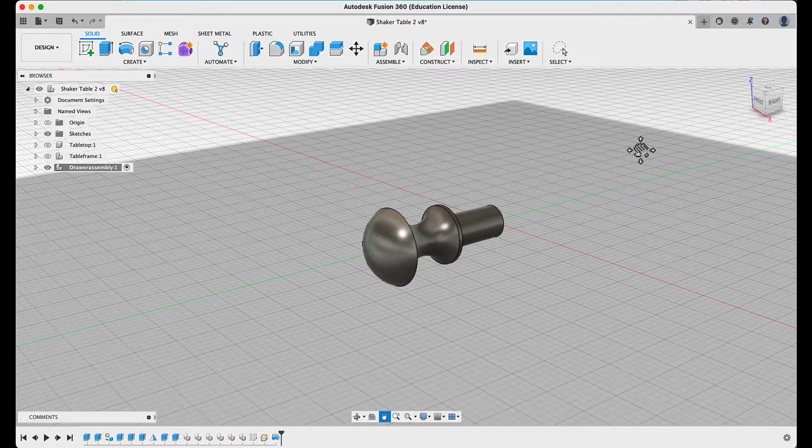In this tutorial, I'm going to show you how to create a simple turned shaker pull for the drawer.

One of the defining features of the shakers were their pegs and pegboards. Pegboards line the walls, rooms and hallways of all shaker buildings.

Chairs, wall clocks, racks and shelves, clothes hangers and kitchen utensils were all hung up on these ubiquitous pegboards, and shaker orderliness and cleanliness were thus achieved.

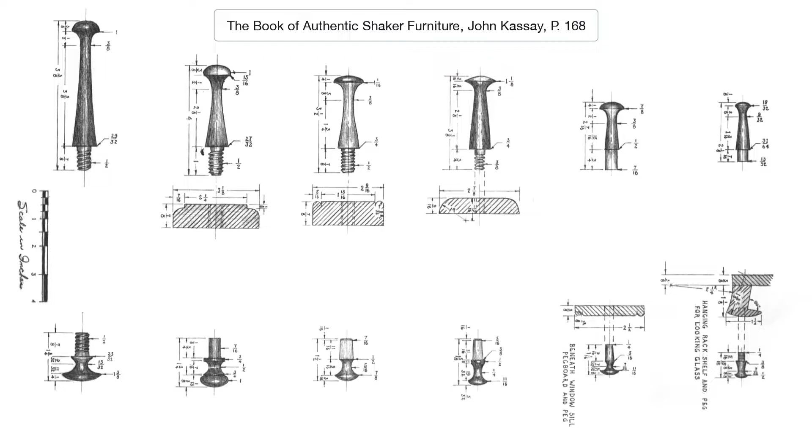The smallest shaker-made pulls, like the pegs, were individually lathe-turned, and most are as graceful as pegs, but considerably smaller. The smallest measure a little over 6mm in diameter and 12mm in length.

Others are as large as 40mm in diameter and 50mm in length. Some are even longer depending on their purpose.

Clock doors, chests, tables and even desk drawers, sides of washstands all had pulls. Indeed, pulls were installed wherever needed. This image is a sample of typical profiles for both shaker pegs and pulls.

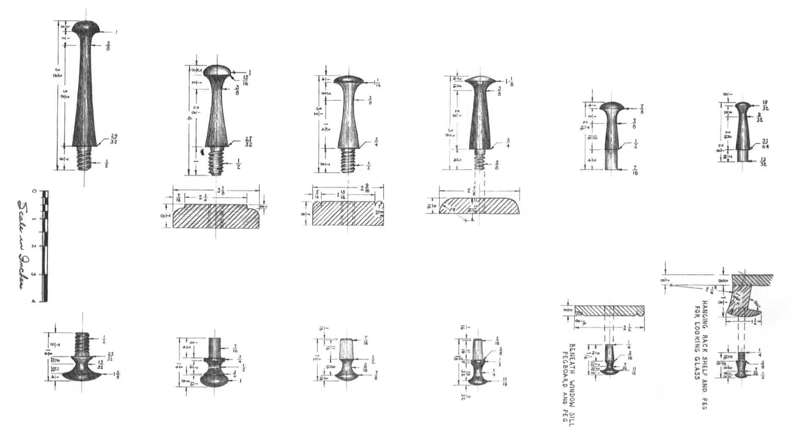To make things easier, we'll make sure we've hidden everything. We're going to start with a new sketch, off the right sketch plane.

I'll come in close because we're working on a pretty small scale. So, a line from the origin, I'm just going to come out to the left.

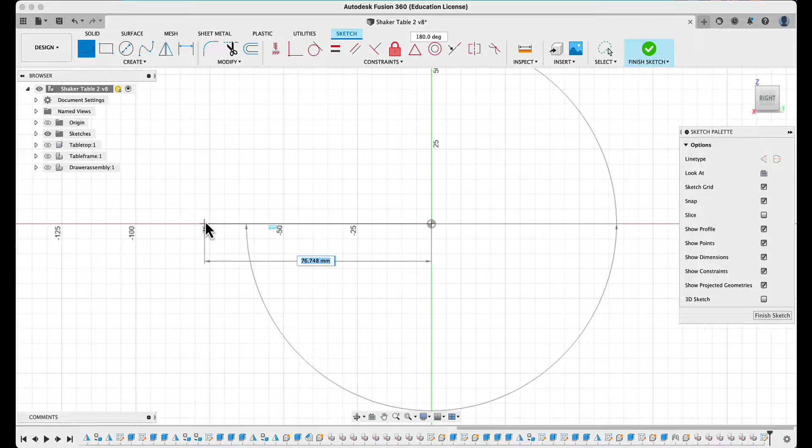Press escape. I'm just going to turn that into a construction line. Come in really close so we can see this millimeter grid here, and I'll pull that down a little bit.

So I'm going to create a profile for my shaker pull design that it can rotate around. That might not make a lot of sense to you at the moment, but you'll see as I go through this what the techniques are.

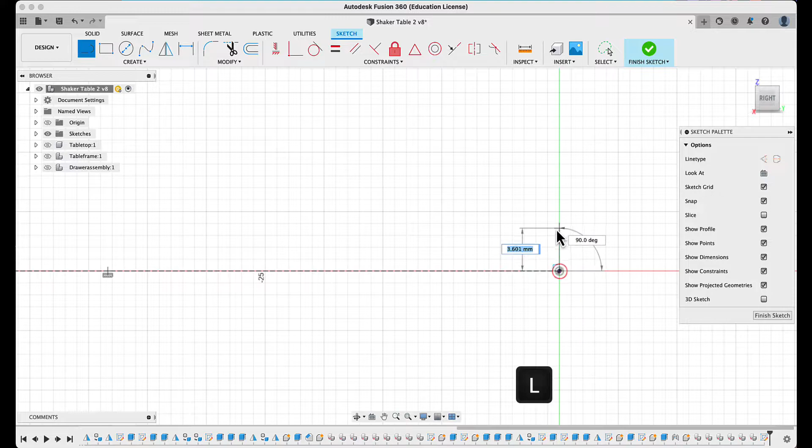So, a line from the origin, I'm going to come up 4mm. Because we're working at this scale, you'll find that it'll snap to the millimeter line, so it'll make things a little bit easier.

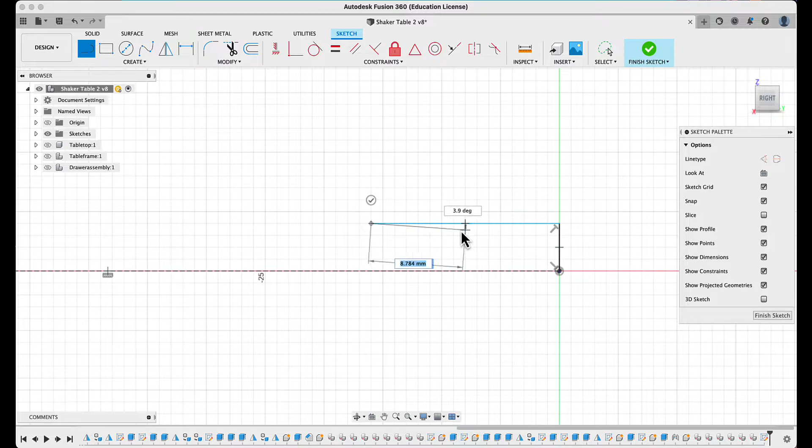So we'll keep going. I'm going to go 16mm this way. Now in the real world, you might end up with less here. When you're actually turning something on the lathe, you want to have a little bit of space here.

And then we'll come up, say, another 4mm, go across one. Just going to pan along a little bit, and press escape, so we're not doing any more lines.

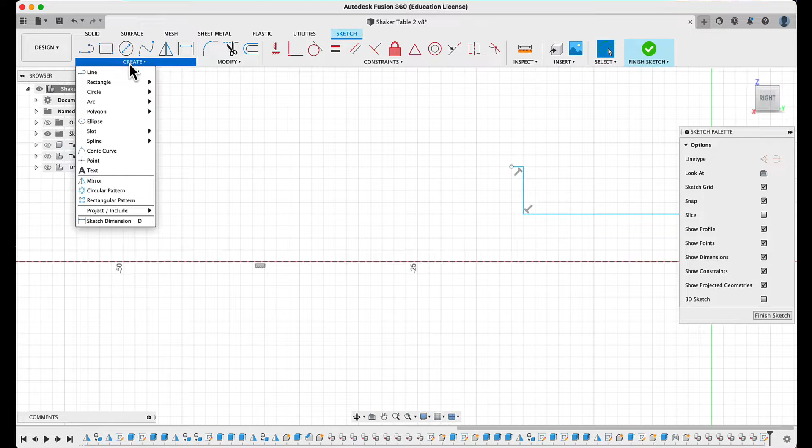Okay, now I'm going to create an arc. This time it's a 3-point arc. And I'm going from this point here, I'm going to come along 16mm to there.

I'm going to bring that arc down so that it lines up with this original line here, and there's our midpoint. I'm going to do another arc, just extending it up this way a bit.

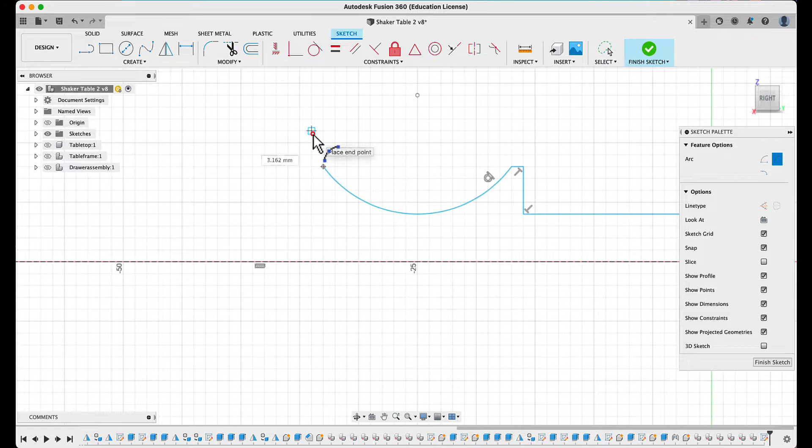The other thing I'm going to do is put in a tangent constraint. It looks pretty good, but I'm just going to put a tangent constraint in there so that it becomes one continuous arc. One more arc for this one.

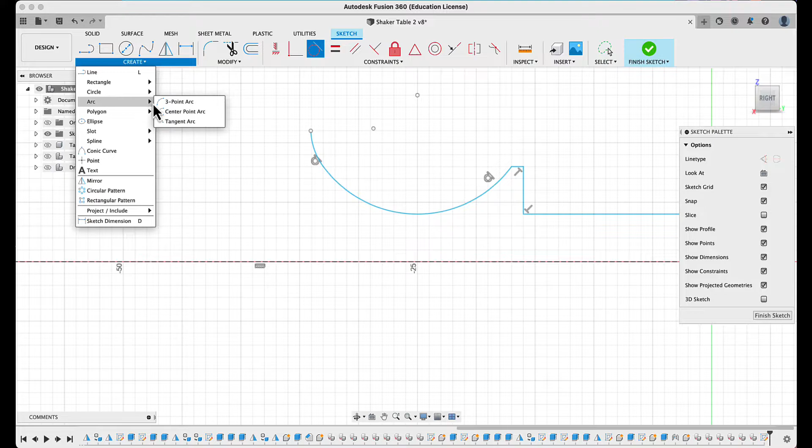Again, it's a 3-point arc from this point here, and then I'm going to sort of judge it up to here. What I want to do, because this is actually the center of my pull here...

So when I make this arc, I don't want it sort of coming back like that. It'll make it look a bit funny on the top.

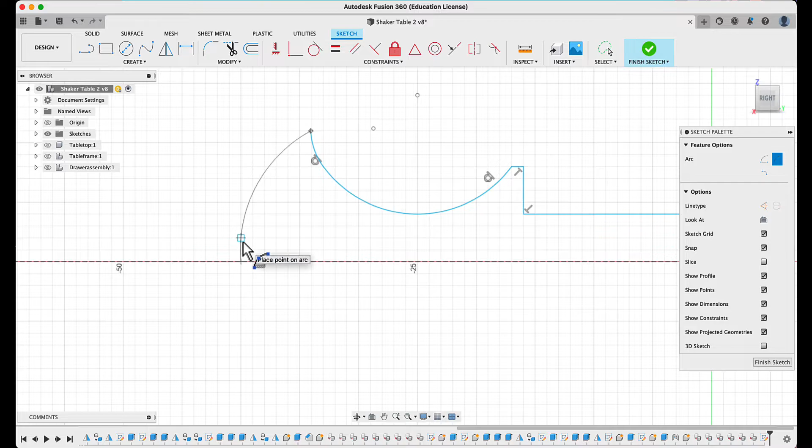So I want it coming in, almost like at a tangent to this vertical line here. So, about there. Okay, so we've got that.

One more line. So we're just going to go from that point there to that point there. Now you'll see that all of these lines here are blue, so they haven't been properly defined, and they're not fully constrained.

Sometimes that actually comes in handy, and this is where I'll show you how. Because it's not constrained, I can actually play around with this, so I might go, oh, actually I want it to look like that, or that.

I might want that to be down here. So there's a whole lot of things that you can play around with from that point of view, so it does have some benefits sometimes.

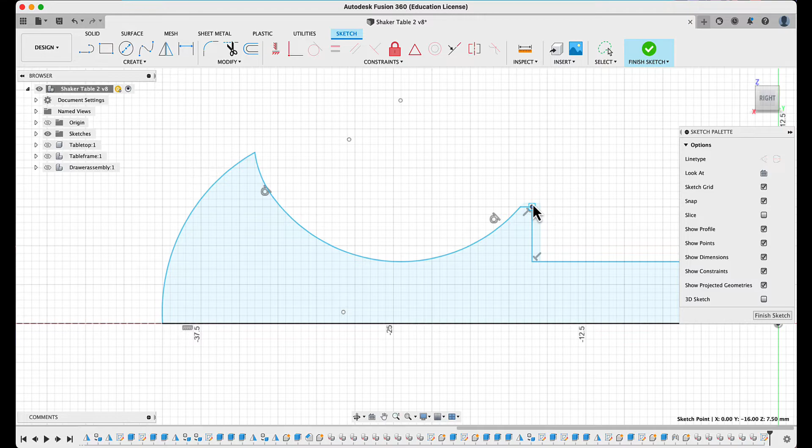I've just got to get that back to where I had it before, or roughly where I had it before. That'll do.

So now that we've done that, we're going to do a different kind of extrude. So we better finish that sketch, and we'll zoom back in so we can see what's going on.

So normally up till now we've been in here and we've just been doing the normal extrude. This time we're going to do a revolve.

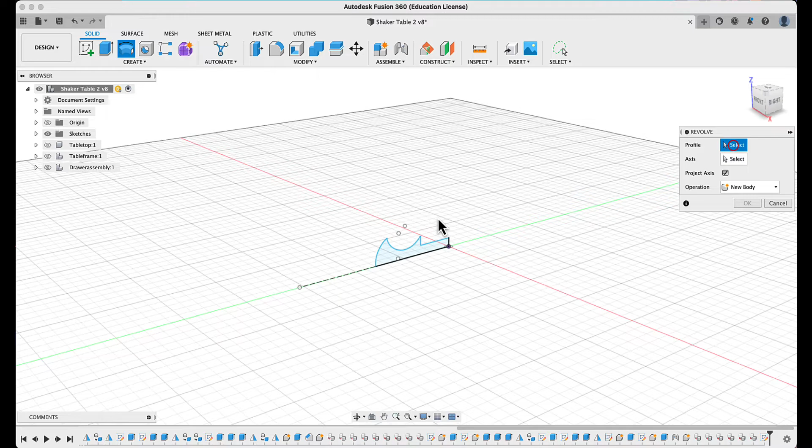So we've selected revolve. We'll go to profile, make sure that it selects that, and then we go to axis, and this is why we put this construction line in here at first. So we just click on that, and there we go.

Now it defaults to 360, and the operation is new body, and we'll go OK, and there you go.

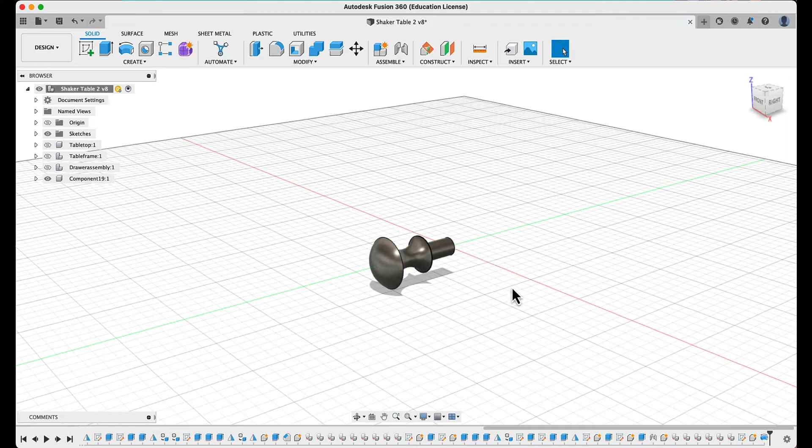There's a really nice, elegant, simple shaker pull. Now what you can do now is actually go back to the diagram that I've given you and just see whether you would like to modify that at all.

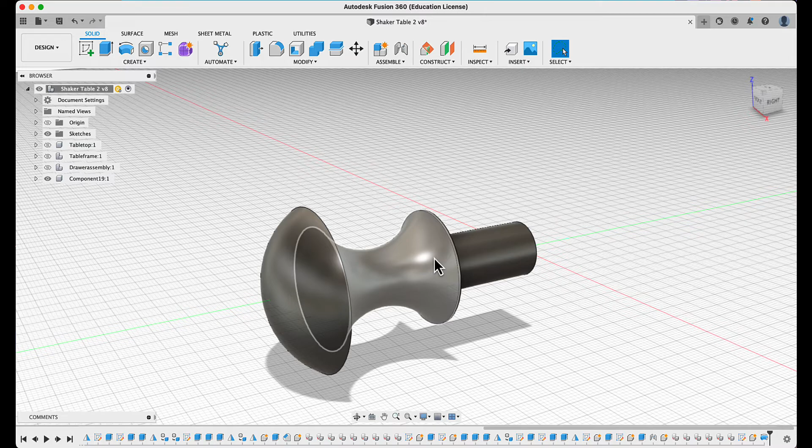So for example, when I'm looking at this, I might want to make that lip there a little bit thicker. And the other thing I might do, I need a constrained orbit—it's kind of not working too well.

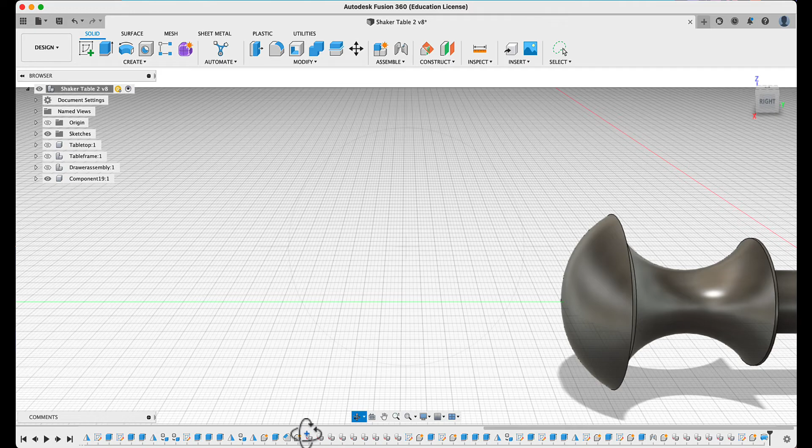And I might just want to make that edge there not so sharp as well. So you can go back into the sketch and play with it and change it.